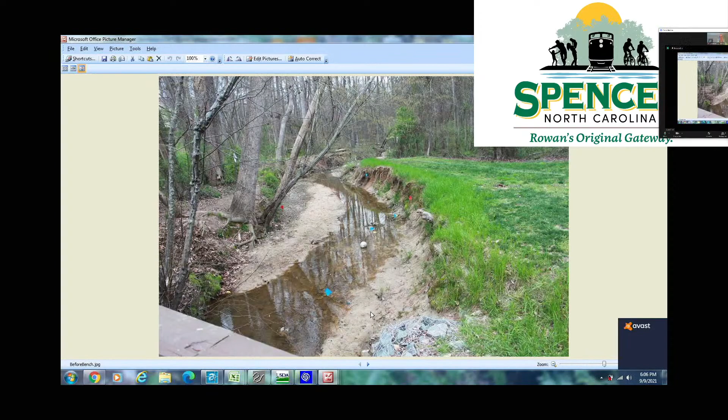We had talked about last time, since the two 36-inch pipes on the left side—this is facing downstream, facing towards the pond if you're looking down 17th Street—opening it up to basically daylight the stream so water can get into it from the road, and also to act as extra storage for bigger storm events while it tries to get through the driveway culverts.

You had asked if we could use the cost share money for that, and I checked with Tom Hill. He said he'd want to see the plans if y'all decided to go that way, but he was 99% sure the sections that were daylighted could come out of that money. But the pipes going back underneath the driveways, and putting the driveways back after we tore them out, the concrete—that could not be covered. And I broke up the cost of that.

I've estimated, because it's about 500 linear feet of stream, the stream work at about $45,000. The reason it's high is because I don't know if there'll be bed material there when we pull the pipes out. If not, I've got to plan on bringing in stone to make the bottom of the bed. Now, there was a stream there at some point before the road was built, so if it was right where we're digging, there should be base material there.

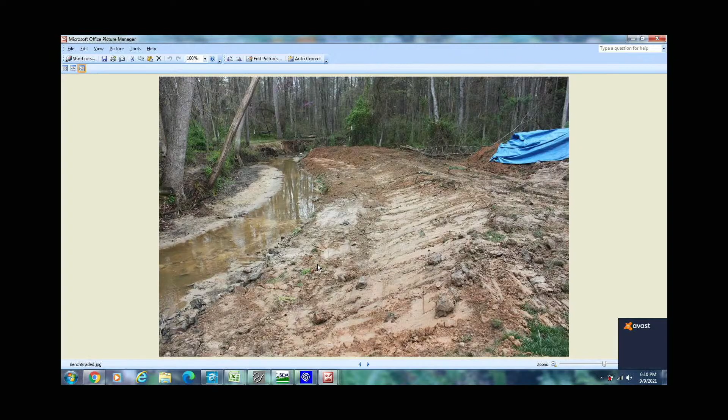Here's one before it went in, and here's one where we graded it. This is a 5-foot bench—on y'all's I'll blow it up—but you have an urban curve bench versus a rural curve bench. Since y'all are urban, you'll have the rural curve bench, plus another bench for your urban flash floods. So instead of a flat 5-foot one, you'll have 3 feet, step up about half a foot, then another 2-foot bench, then slope back into the existing contours. This is what it looks like once it's matted and live staked.

Another thing to mention: for the contract period, they are not allowed to mow 10 feet back from the front of the bench at the top of slope. It has to be left with some denser vegetation if it's being paid for by cost share. If you want to do it yourself and not get cost share, you can mow it, but if you use the cost share money, that's something to think about. They cannot mow within, or spray and kill vegetation within, that 10 feet. They can keep it maintained at about 6 to 12 inches, and we can do native grasses, but they can't mow it like a lawn.

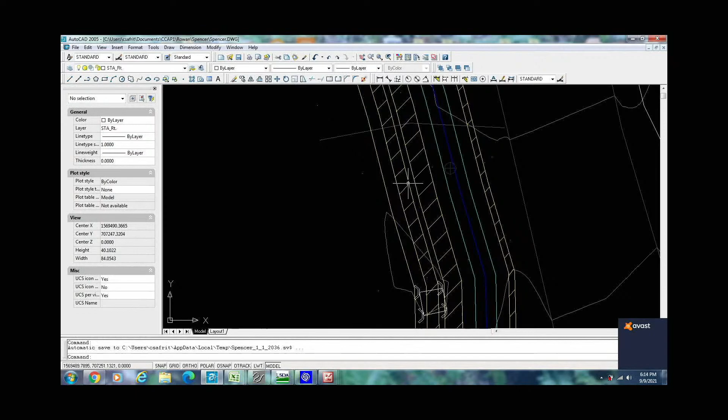Is that the part highlighted in yellow? The yellow is those benches, and if I scroll in right here, this is that first bench I was talking about, it's 3 foot wide, then a foot just for that half foot of elevation jump, then another 2 foot bench, and this line is where I tie back into the existing ground. For landowners to know, it's everywhere through there. A few places I'm a little over, but I'm about 25 feet from the road edge into their yard that I'll be taking up with what you just saw.

And the homeowner has to okay this, is that correct? If you want to use cost share money. And if we daylight the stream, I have to submit for 401 and 404 permits, and every landowner has to sign an agent authorization form giving me permission to apply for permits on their behalf.

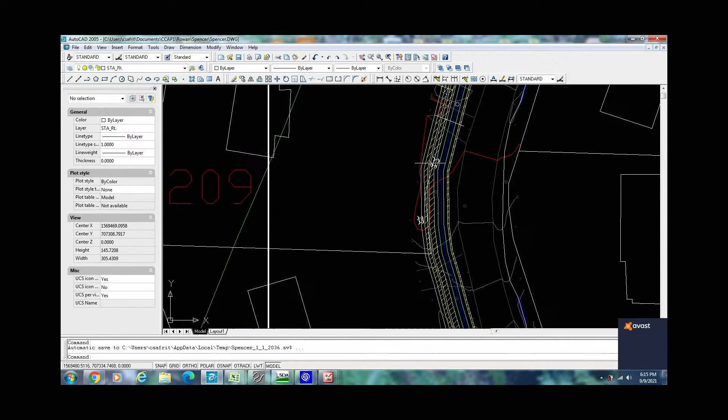Basically, they're going to lose about 5 feet of their yard, is that right? Probably, well the people that already have the stream open will lose about 10 more feet, but these people, it's piped. I don't know if anybody's rode out there, but right here is where a yard inlet is at in this house. Let me measure it, I think that's about 5 to 7 feet more into their yard from that yard inlet. They're used to having it flat out to the road, and it won't be, it'll look like a stream channel like the pictures I showed you before.

What about water mains, water services, and sewer service? Well, you've got a pipe there that's a 36-inch pipe on this side, and I won't be going lower than that, so I shouldn't hit anything on the left-hand side. Now on the right-hand side, when we get to it, I'll probably hit some hydrants if they're all right below the surface like we talked about. If they're right below the surface, then the lines to the hydrants will need to be lowered, and that's an extra cost on the city.

If you want to do the right-hand side, we'll go over that in a minute, what's got to happen there. But on the left-hand side, I shouldn't hit anything because you have a 36-inch pipe running through there now, and I'm not going to go any lower than what that pipe is. Well, I need to go 5/10 lower, but I don't anticipate hitting anything additional in that 5/10.

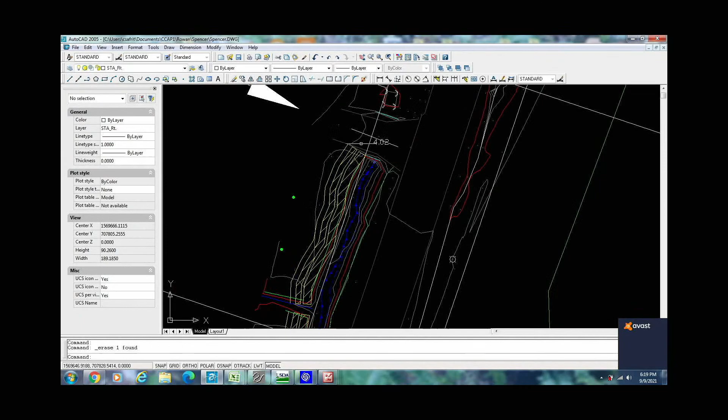I'm worried if you lower the ditch in 403 to 409, 6 more inches, you're going to run into problems with sewer lines and water lines. I need to drop the... okay, I can leave everything where it's at now, but I wouldn't be able to seal it because I have to have a foot of cover over a 36-inch pipe to meet standards.

Right now, y'all, the pipes that do have 36 inches, all your pipes basically down through there do not have that amount of cover. And you can go back with that. It won't pass quite as much flow without the foot of head over it. But then I wouldn't have to lower it at all. I do need to lower it just 6 inches to get the 36 inches.

Still probably going to hit it, okay. I would think. Do you know where they're at? I do not on the left side, because all you're going to get on the left side are your services. You need your taps and your services. I know where the main line is on the right-hand side.

We know where it's at. Joe, is the sewer line going down that street? Sewer line, center of the road. Center of the road, you don't know how deep it is, do you? I do not. That's something we need to investigate before we do anything. Well, we can have 811 come out and mark stuff and then find out how deep stuff is. Randy could tell me real quick what the depth is over there. Yeah, and so we can get the depths.

It's not very deep. The other consideration there too is when we open it up, sewer laterals coming from those houses, are we going to be exposing them? Because you've already got one sewer lateral that comes out down there just below the property you're showing right now, I believe. It's the last house on the left. Yeah, that's in this corner.

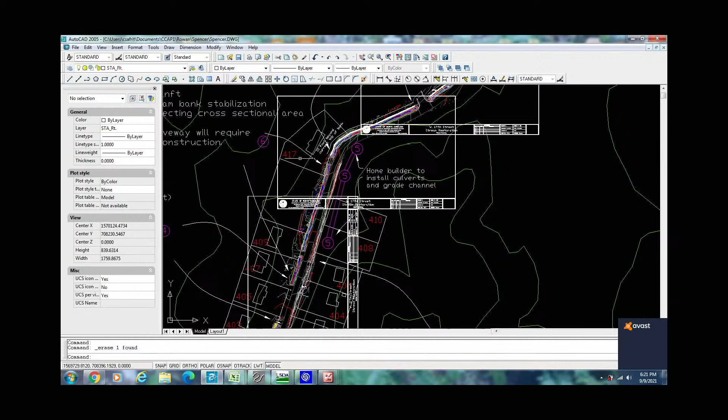Isn't it this one? There's a sewer lateral showing right there. That's those pipes right there. Correct. So my concern, I guess, is if we open all of this up that's already covered. They had to run the sewer laterals below the 36-inch culvert, correct? Right.

Unless they're just within half a foot of the culvert—and two, I can put the culverts right where they are now, and we know we won't hit anything—but you can't use cost share money on it, and I can't seal it because you won't have the foot of cover over the 36-inch pipe.

Right, or we can do a 24-inch pipe, which will raise it and won't pass the 2-year storm. Or do 24 inches, which will get you maybe the 5-year storm, and then do a weir section.

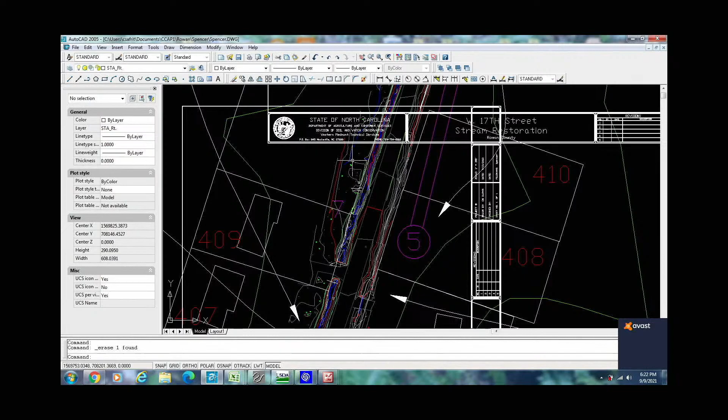I think anything we need to do needs to be 10-year storm or above. That's kind of a typical standard of other municipalities, and that's what we need to be doing. So I'll have to do weir sections in the driveways to get you the 10-year storm. And what driveways in particular would need those?

The ones with 24-inch that require greater than the 36-inch culvert, or all weir? All of them on the left-hand side require that. I mean, they'll have to be.

Two 36-inch pipes will pass it so the channel doesn't build up sediment. You put one pipe, the 36-inch, in first on the bed of the channel, and then raise the next one up half a foot, which keeps your main flow through just one pipe. That way you don't get sediment buildup that keeps backing up. It keeps it moving fast enough to move the sediment through, off the roads and through the other channels leading to it.

You won't quite pass the 10-year storm with that, but I could do just a little dip in the driveway and get you to pass the 10-year storm, if you want to do that. Or I can just do larger weir sections in the concrete driveways.

But anything over your 5-year storm, they're going to have water running across their driveway. But they have water running in the whole street now, so it won't be deep—maybe 8/10 of a foot. I think it was 8/10 deep during the 25-year storm event. Yeah, I think our goal is to keep water from flooding the streets and from flooding adjacent properties.

Agreed. I was going to ask Peter and Joel, is that something you can begin working to help pull together—a meeting of those property owners? I think we need Cindy to present, but I'd love the opportunity as well to talk about some of the logistics and the benefits of doing this. But we need their input. And I think when we talked last time, this very topic came up, and it's certainly the next thing we need to do. We were waiting on this update so we could have some information. But yes, we've got to engage the community and make sure everybody understands where we're headed.

I agree, but we also need to pinpoint what area you're going into, to know what homeowners we're targeting. That makes sense, because the original plan was to do everything below the homeowner, and all of those homeowners were involved up front—they went before we went to get the money, and they were all on board. But they already have open channels, most of them, and we would just be replacing driveway culverts and taking 5 or 10 more feet of their yard, which isn't a big deal to them. It's already eroding and looking bad.

But these have never—because we didn't bring up until the last meeting—about opening up the channel. So we were just thinking, if y'all were going to do something, put in another pipe, another 36 inches, which still won't carry even the 5-year storm event. But since it was just going to be additional pipe, we hadn't gone to them, because other than construction, it wouldn't really affect them that much. It'd be right back like it was.

I mean, we only have, what, 25,000? Yeah, from us, and I don't know how much y'all have set out. I did get a rough bid from a concrete guy, and he estimated tearing up the concrete and forming up and pouring it back at about $3,000 per driveway. So every driveway we tear up, you're looking at $3,000 to put it back, plus the cost of the pipe, and then the channel work.

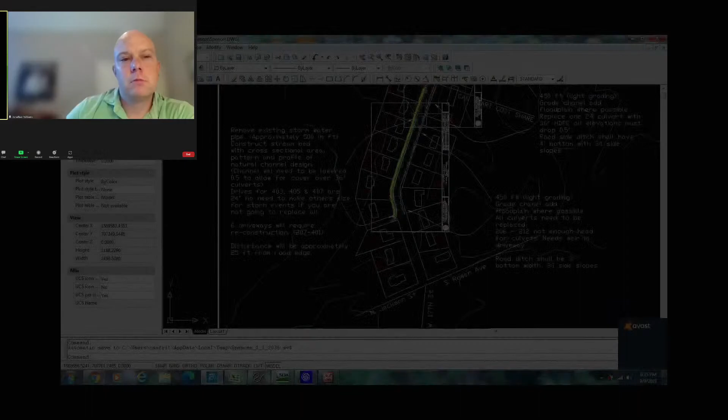And for the 404 permits — even if you don't use our money, I still have to get 404 permits and 401 permits, and I have to have their sign-off to submit for permits for them. So yeah, all of them have to sign off on it, including the homeowner.

If I don't have to seal it, then I don't have to have that foot of cover over the 36-inch pipe, although I still would recommend it — that's what the manufacturers say you should have over it. I might could pass a little bit bigger storm events if I'm not trying to get the correct amount of fill over the pipes.

We're still in the same situation, where we're only making a minor improvement to the amount of flow it can pass for what amounts to a whole lot of pipe money. So if we're gonna do it, we need to do it right.

Can I ask a question? I'm assuming all this water is gonna be channeled into Grants Creek, eventually. Okay, so I know the project you're speaking about is way below the pond. But what impact is it gonna have on the force of the water going towards Grants Creek?

Well, in the bigger storm events, you're still getting all that water, it's just coming down the roadway. But by the time it gets down there to the end, it's making its way back into the creek. Anyway, you're still getting it, you're just not getting it all in one spot, channelized. But when we do the design of the channel, that's why we have the different benches, so that your higher velocities stay in the center, and out toward the edges the velocity is a lot slower, which keeps it from eating up the banks.

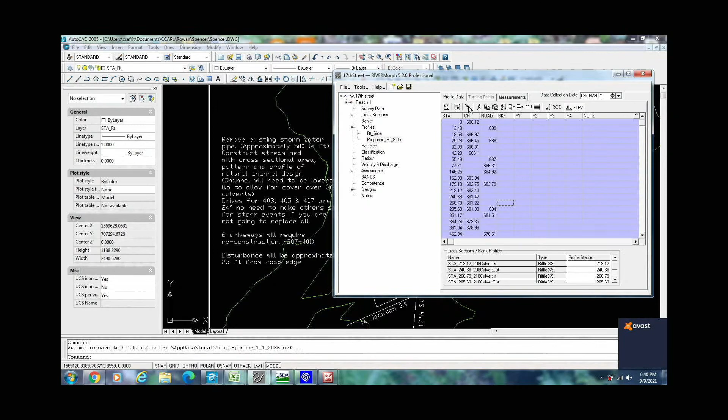This is basically the long profile. I went down the ditch starting at 202, right there in the bend when you start coming around, which you can look at on your plan. Actually, it starts at 206. This right here is 206. I'll turn these on - these are the culverts - then turn them back off because it gets hard to see. Here's your 206 culvert, your 208, and your 210.

What happens here - this line, which was sent to you electronically, is the existing ground. These right here, your top line, is your road. Your plus sign line is your existing ground, and you can see right here, your existing ground and your culverts are inches below the top of road. So there's no way all that flow, even in the 1 year storm event, isn't coming out into the road and into their yards, just like y'all said.

Here is a proposed ditch line and culverts that will work, but for 206 through 212, if I leave the line here, I still don't have enough head to put a pipe in there to pass the 10-year storm. So they would all have to have basically a weir section or a channel through their driveway. Otherwise, it's going to come out into the road still. It can get into the ditches on down the road once we start getting some head that we can get over the pipes.

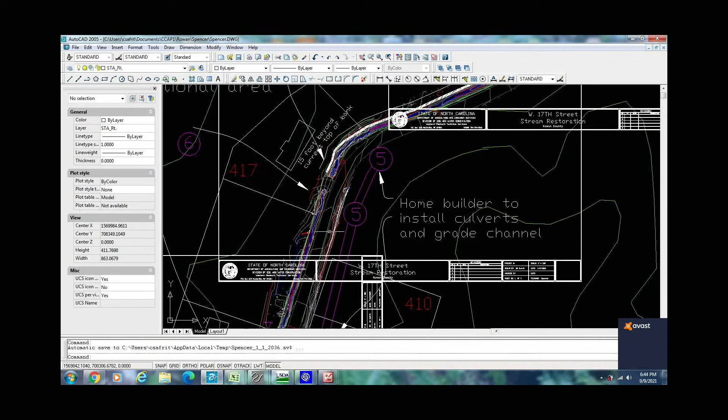25-year storm event without doing a dip in their driveway, but the lower one cannot. So if we don't make anybody else do it, it probably wouldn't be fair to make them pass. I can pass the 10-year storm with them without putting a dip in their driveway, but because of that extra, there's additional drainage area that comes in after 408 to 410 that bumps them up, and it gets really flat. I looked downstream to see if I could drop this channel more to get a bigger pipe in to pass it, but I can't.

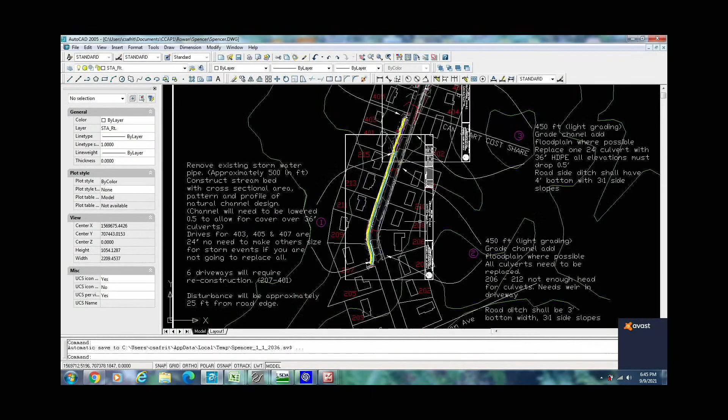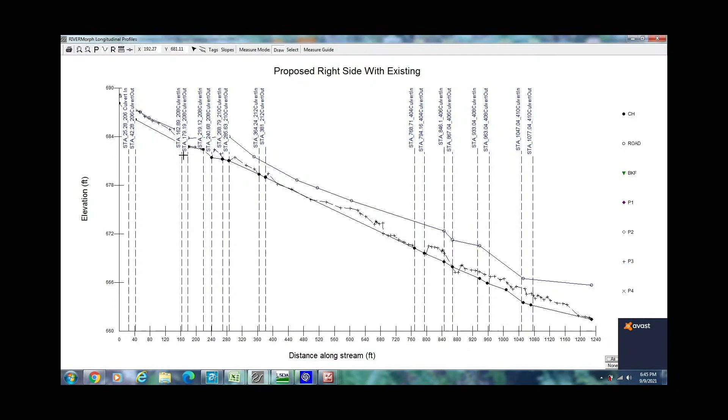There's just not enough slope to have even downstream. So I can go back and look. I'm pretty sure I can get their 10-year storm through just a pipe. But that's, you know, I added while I was waiting to do number 2, which is 206 to 212. You're probably looking at about $15,000. And we hadn't talked about doing that at all. I didn't really, I mean, I knew it looked like the water wasn't getting in there, but I didn't know how bad it was until I plotted out the long pro.

So it's all really how much money you want to spend. And then if you don't want to do dips in anybody's driveway, I'll have to get a little bit more survey data on these people's lots to see, when I drop it down 2 more foot, I'm probably going to go back into their driveway a lot more than the other people's to tie back in at a respectable slope that they'd want to drive up.

Now, where you start at 207, the beginning of the line, you're picking up flows coming off Salisbury Avenue, behind these properties here, right? Behind 203, 205. Are they getting affected also, aren't they? There's no ditch. You've got water draining coming from everywhere, coming down from Jackson Street, and water coming down from Salisbury Avenue.

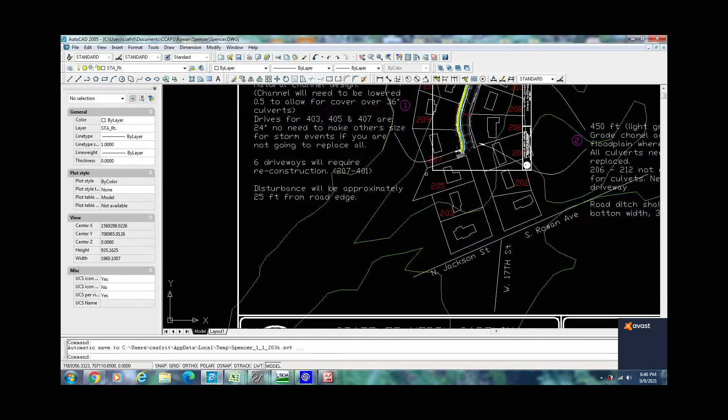From the embankment. I can show you the drainage area if you want right here, but there is an open channel that comes right here and comes between 207 and 205. And it enters your culvert, and that goes straight up to Salisbury Avenue. But all of them have open channels.

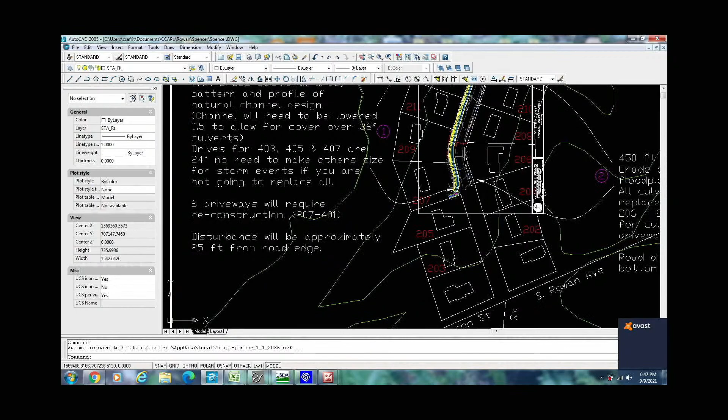What your problem is, your road's so low, and there's just so much water, there's not enough room to get big enough pipes in there. On up, I don't know if they're having problems, but anywhere where they've got the open ditches and a good amount of slope, they shouldn't be having problems. It's because you're so flat through here, you're getting all the water, and then the road's low. So I just don't have a lot of room to keep it from getting out into the road.

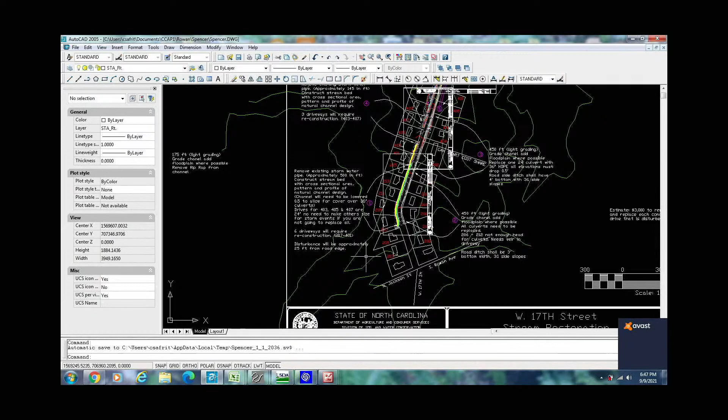And just keep in mind, farther up, what you're talking about, where Cindy's showing, that's City of Salisbury. Oh, is it? So yeah, where her cursor was, that's all City of Salisbury. Right, so I can pull up the drainage area if y'all want. Part of their drainage area actually extends into Salisbury. So my thought is we can only control what we can control.

And in the middle of 17? Yes. No, it's up just a little bit, but I think that one house on the corner is right at, is pretty close to the dividing line there. Might need to pull up GIS to take a look.

From Rowan Avenue back, the first house on the corner is Spencer, and the house before it is also Spencer. The other three houses on that side are all in Salisbury.

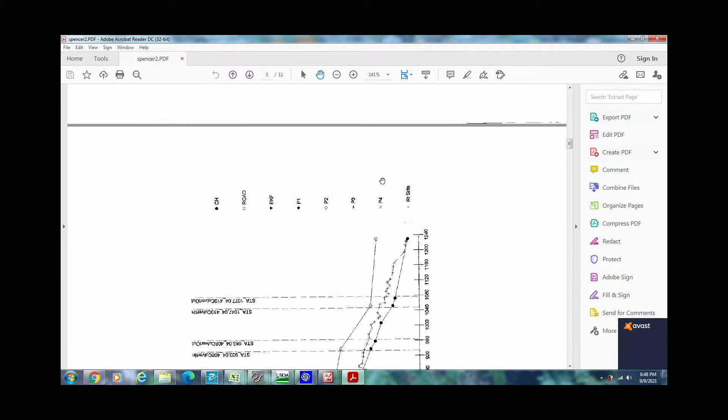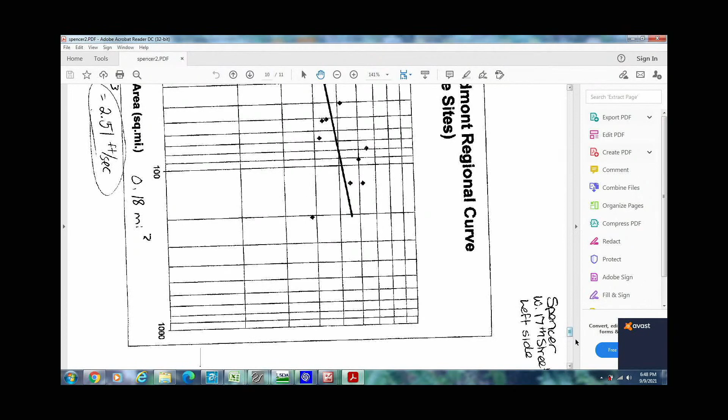Can we put a giant sump pump in there and shoot it back into Salisbury? From that corner, it goes half the street to Salisbury Avenue, which is Salisbury, and the other half of the street, if you notice, there's a paving line in there. Yeah, we paved half of it, the other half belongs to Salisbury.

It's kind of a weird corner right there. A little strange, but yeah, you're getting all of that water, all of Beauregard and Pickett's water, and then, you know, Street 207, that's where it goes.

Where they built that little tiny house on the corner, is that on Rowan? Rowan, yes sir. That's on Rowan. So is that a Salisbury house? No, that's a Spencer house. The little one with the statue, right across, in front, right across Rowan on this side.

Okay, I can't remember what the lady's name was who lived right there. Got it, it's the house with the red roof. That one on the corner, and the one before it is in Spencer. We service those two houses with garbage service. The other three are Salisbury.

Okay. I can show you the drainage area, but there are a couple things we need from the board tonight. One of them is we need some direction from Ms. Safrit on what level of service we want to provide for the design.

Do we want the 25-year, or do we want the 10-year, or do we want something less? My recommendation, based on everything I've seen, would be that we do similar to other municipalities, and for this particular project, we would adopt the 10-year storm as the design storm.

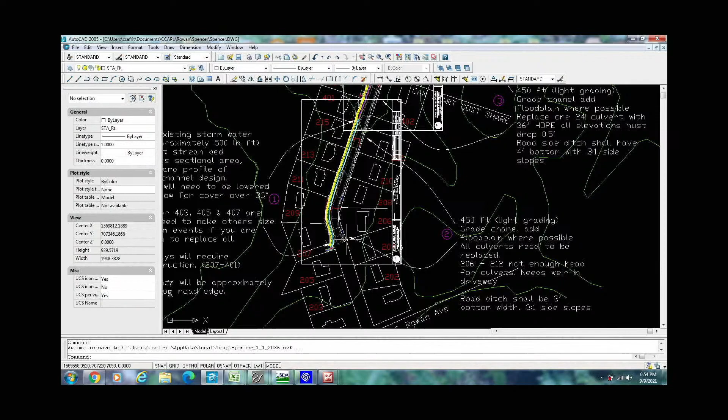Yeah, most of the houses through there, their elevation is higher than the road. The house itself, the front yard dips, so the water collects in the front and then it keeps moving down. So I haven't heard of any of them going into the houses. But like when we had the hurricane, we got a day full of nothing but solid rain, water was well into their front yards. And then it gets there and it stops up those drains.

Well, then the water's this deep and I can't get out there to unstop the drain. But it doesn't matter because the pipes are already full from upstream. It doesn't really matter what you're gonna do at that point. They're not gonna take any more water.

Another issue I think we've got there is we've got several driveway culverts and pipes that are already in the ground there. I'm concerned, if you notice, there's several very small culverts under those driveways, and there's several that are completely collapsed. Joel, I don't know if you've noticed that. Oh, yes. So that needs to be a focus of this project as well. If we're gonna fix part of it, we need to fix it all.

Well, that was one of my questions. I can do it, but drop it down and handle the 2-year storm through there, and I think get culverts that'll pass it if I can drop it down about 2 foot. But I know in between these houses, I got 2 hydrants at least, maybe 3. I'm not sure if that's a hydrant or a power pole, he didn't label them for me, but I know that's a hydrant.

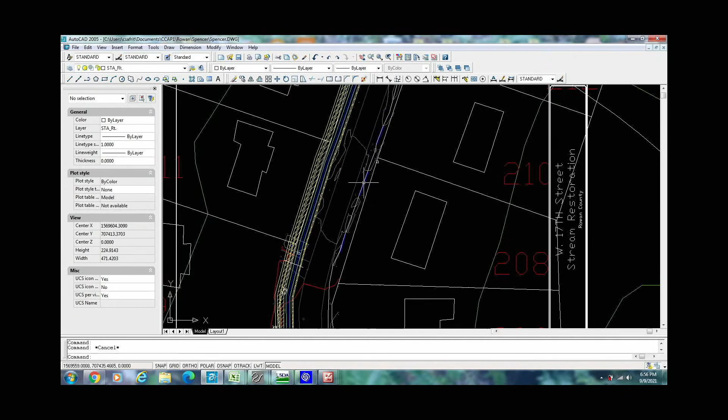I think there's only two. Yeah, two. So there must be only 2 and a power pole. And they put in another one, because I remember that. I think there's 2, and then one at the new houses down there. If I drop it down 2 foot, I'm likely to hit a good little bit of stuff and have to move a whole lot of stuff.

So that was one thing. That's why I didn't know if you wanted me to do dips in their driveways there. I can do dips in 206 through 210's driveways and pass the 10-year storm, and not have to drop it down so low. I still need to drop it down about a foot from where it is now. Up on the high side, we might can get that.

Okay, but down in that creek bottom, we know where it's at. Yeah, you're not gonna get that at all. So I think one of the things, Joel, that we need to do is get with SRU and their GIS to get the inventory and elevations on the SRU utilities, because right now we're just speculating where that stuff is. So what we need to do is know for sure, based on the elevations that they have.

Then we can go from there with utility locates. But it does sound like, if we do it right, we're probably going to have to do some type of utility relocation. And that's a conversation we might need to have with SRU. I just don't want to halfway do something and say we've done it, and it not alleviate the problem like we wanted to. It's a whole lot of money, effort, and time to not get the result we want.

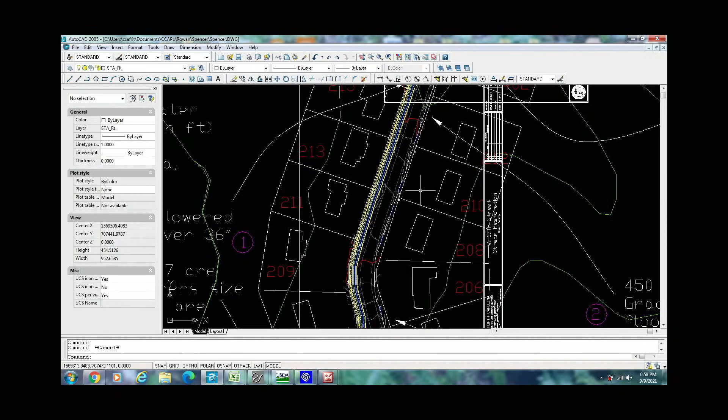You'll pay 75% of what it's gonna cost you and not pass all your storms, but the 10-year storm is doable. The 25-year storm is not doable without putting dips in everybody's driveway. So my question back to the board is we need to provide some guidance to Ms. Safrit and our staff on what level of storm we want to design to for this project, so we can also communicate that in our educational sessions with citizens and homeowners in that area. My recommendation would be a 10-year design storm, but I'm open for comments and feedback from the group.

How do you feel, Joel? I agree with the 10-year storm. I think the 25, from the numbers we've done, especially with the new houses over there— I'm not gonna say it's not doable, because it is doable, but it's gonna get really expensive really fast for a 25. I mean, utilities are not even gonna be a question at the 25. The 10, I think, is very doable, and it would be a major improvement over what we have. Just my opinion.

And like I said, nothing will fail with the 25-year storm, but it will get out into the road and overtop driveways and stuff like that.

This piece of paper here says 153,500 for the total job, not counting— that was my rough estimate, and that wasn't counting utilities because I hadn't gone through and done it yet. But if you add that, I put about 15,000 for it. That's if I only have to take out about a 25-foot section of their driveway. If I've got to take out more driveway to tie back in and drop them down, it'll be a little bit more than that. But I have to get some more survey data—I didn't get enough survey data of their driveways.

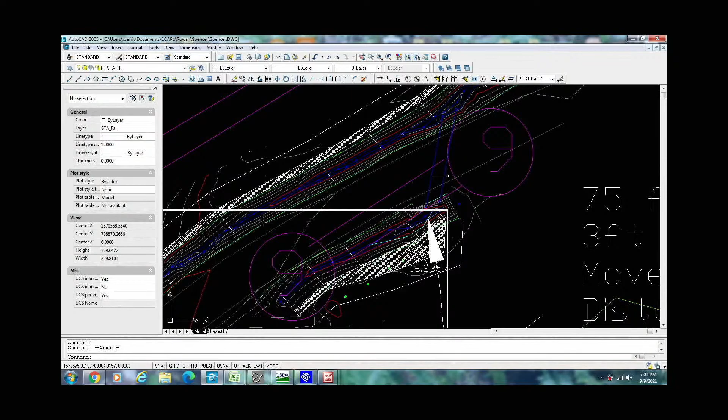Right down here is the pond, right in this area. The crossing is just below that. Do you have that pipe that goes under? Yeah, right here, this pipe is the one you're talking about. That's it, that's the trailhead where the trail comes out to Spencer Avenue, where she's pointing right there. That pipe underneath is needing to be replaced as well, but that's a different funding source.

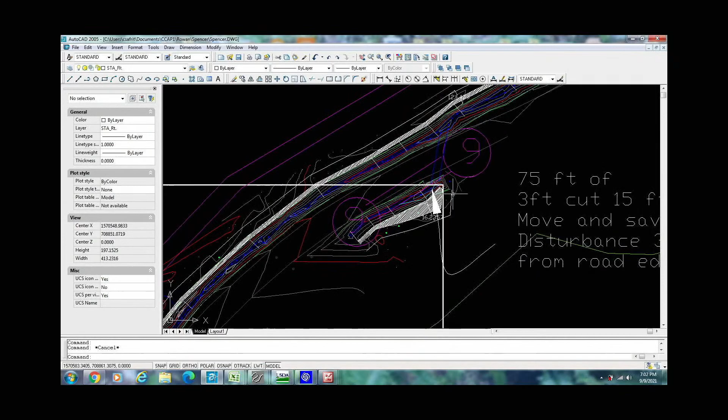We can work around that one. The question I have, just throwing it out there as far as direction, do you want her to continue to work on this, and then the 25 CCAP we have a time constraint on? Do you want to go with the original plan to widen the lower part? I think that's my question, and that would be my recommendation to the board. Since we're only talking about $25,000, we need to move on that.

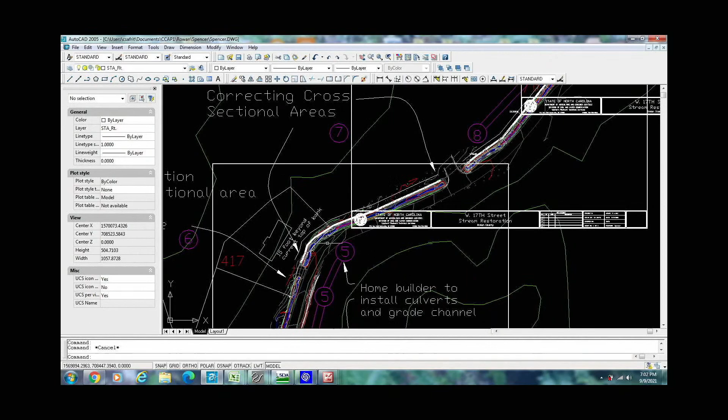Agreed, and we got a time constraint on it. We need to get moving, and she's already got the plan, she's got everything, you can pretty much get ready to start construction on it. And then, I'd say it's my opinion we have a time constraint on all of it. It's just one relates to funding sources, and the other relates to bettering the drainage for our citizens. I agree, but the first part is gonna dictate the next part.

We said you were widening what? Lower, from basically Pickett Avenue to the crossing down at the bottom. In that area, she's gonna widen the ditch to accept more water. So basically it's more like a reservoir, that way the water doesn't stop upstream, it keeps coming until it fills that up. So that's kind of a relief, and then the part as you go on up the road will just build upon that. The water will get to that point faster, but it keeps it out of the road, so it's kind of like building blocks.

This part is not gonna hinder what we're gonna do later. It's just the fact that we can move on with this because we already have the permission, we already have the landowners, everything's fine and it's ready to go. So we can see some progress. You're talking about a narrow 2-lane road now. Yeah, but the ditch is gonna actually widen to the other side. It'll be benched on the other side.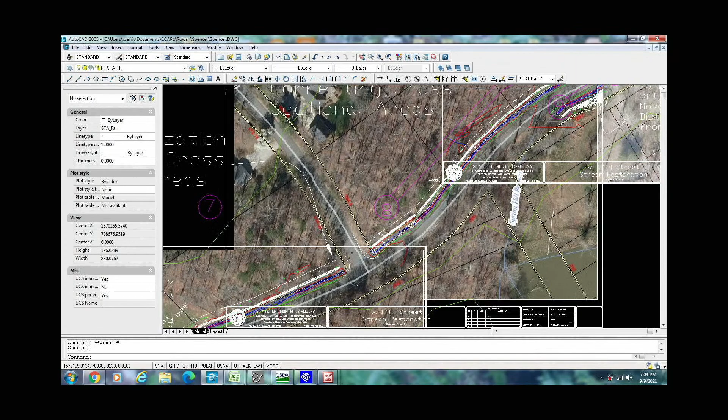I put it on the aerial so you could see which houses and lots were involved, but I can take it off if you can't see. Right here is Pickett, and right in here is your stream, and it hugs up against the bank. So all my work will be to the left-hand side, and the same is true down here. I'm going to be coming into these property owners about 25 to 30 feet with the benches and where I tie back into existing grade. All of the work there will look like the pictures I showed you in the beginning, that's what those hash marks are, those benches. I think you said you own maybe down here, these are all empty lots.

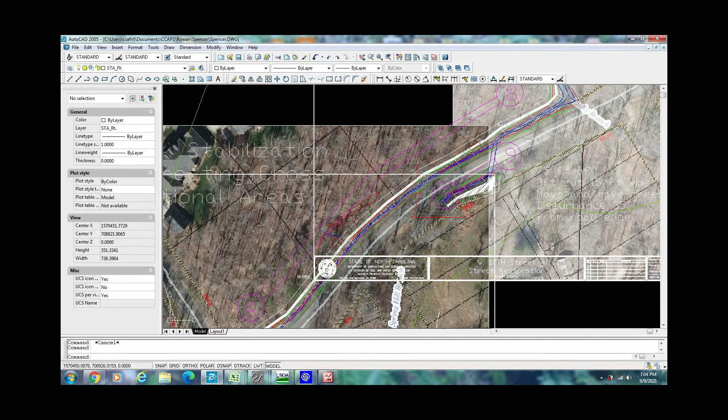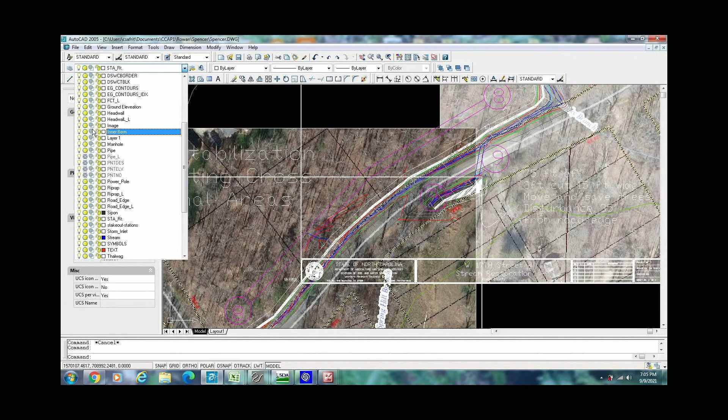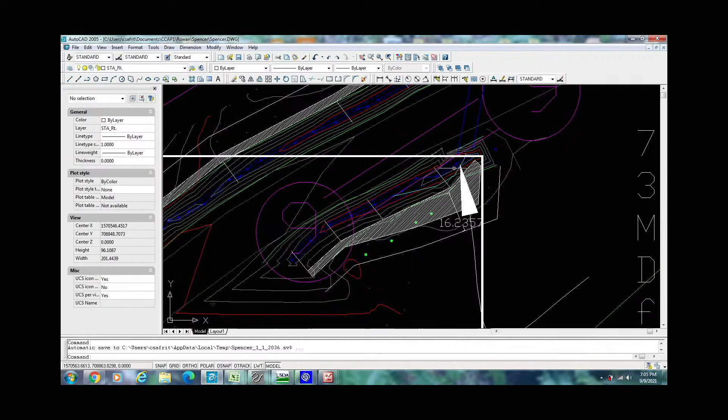Well, there was 3 right through there. And then this one is the one that lives by the pond, which I thought maybe they were gonna sell at some point and y'all were gonna buy it. I don't know if y'all have yet. But we talked to them in the street when we were out there surveying, and they gave approval to theirs. I need to come back into their yard more because this pipe is on a horrible angle, and I need to realign the stream here a little bit and put in a structure to get it into that pipe. I need extra area here to make that curve. They have a lot of trees, I don't know what kind, but they gave us permission to dig them up and replant them, knowing they might lose some when we do that.

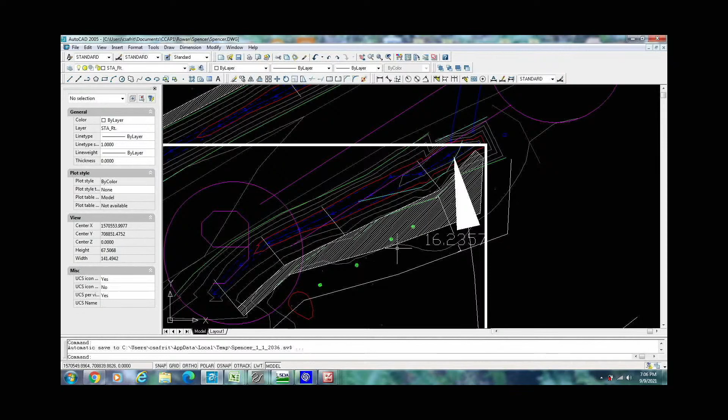But to do this, I'll have to submit 2 different permit applications for the 401 and 404 to go ahead and move forward with this one. So it'll cost $570 to submit the applications, and that would be 2 times that you'd have to pay if I split it up.

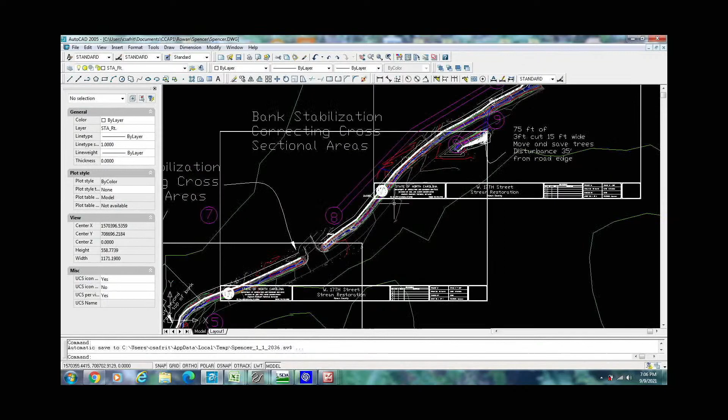But I think linear foot wise, you might get kicked into 2 anyway. They only let you go so many linear feet before they make you do 2 anyway. All I would need is the landowners' signatures in the areas we're gonna work. So if we wanted to meet with them and get those signatures, I'm ready to submit those for permits as soon as we get the signatures.

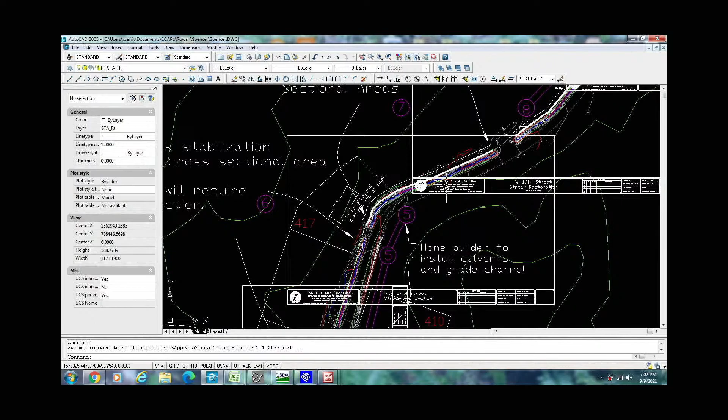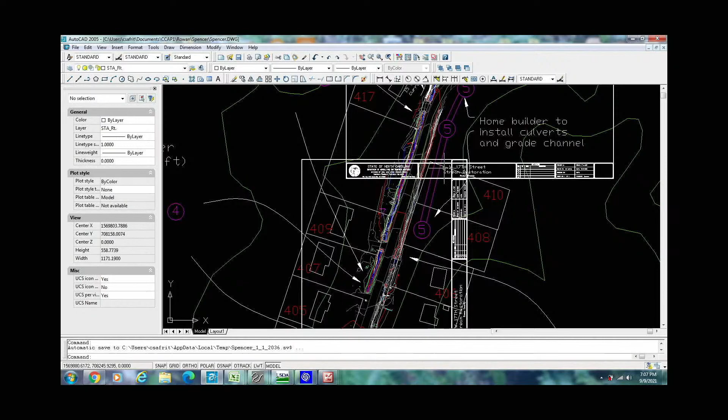So my recommendation to the board would be that you consider moving forward for this particular portion to use the CCAP funds and get that underway. Then we'll continue to refine the upper portion of 17th Street because we definitely need to move that forward, and we need to know cost on that and where we'll use the funding source. But my opinion is we need to get moving on at least some of this to show we're making progress in the area. So what Ms. Safrit would need tonight, and Joel, would be a motion from the board and approval to move forward with this particular portion of the CCAP project and to apply for those permits.

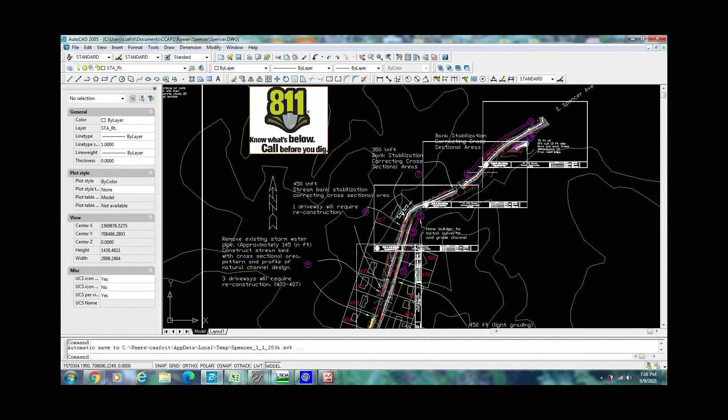Mr. Mayor, I make a motion that we proceed on behalf of Ms. Safrit and go ahead and do this work. I second. All right, there's a motion and a second. Any further discussion? All in favor, say aye. All right, all opposed? All right, that is unanimous.

And so Ms. Safrit, you have our direction to move forward and go ahead and apply for those permits and move forward with that particular portion.

Well, I guess Joel, are you gonna set up the meeting with the landowners? Are we gonna meet and show them, separate from the other people, what we're proposing? I've got to have their signatures before I can proceed, and yours too, which I included a copy in one of the submittals of the agent form, but I'll need that signed from y'all too. They're electronic submittals, and basically I'll send y'all an email when I submit it, and at that point you'll need to mail the check to DWR. I'll give you the address, but you'll need to mail the $570 check to them when I submit the plans.

But somebody will need to get all the landowners together. Well, since we've already discussed this with them once before - well, we hadn't with these empty lot people. I don't know that they all came to the meeting. I know all the people up here, the 409, 417, the 404 to 410, they were at the meeting and they're all on board. They're very affected by it. But down here on these empty lots, I don't know. I don't know on the empty lots, I don't know that they know, but we've gotta have them.

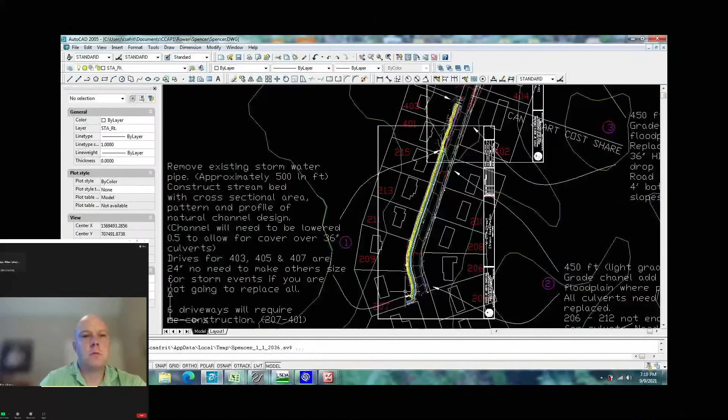Okay, I will, but I'll find out what those are and then what we need to do, Cindy, whether we just need to go talk to them individually or get them together as a group. Okay, and we'll figure it out. And I guess for this upper portion, I know you said wanting to get a true cost estimate from a contractor. I have several that'll come bid jobs for me, but I hate to abuse them. I don't know what to do first. If the landowners aren't gonna sign on board for this, I almost hate to waste their time getting them to bid all of this work and the box culverts or whatever culverts we gotta do, if the landowners aren't gonna like it.

So I don't know if before we get a cost, if I can design it to the 10-year storm, get their approval, and then get a cost on it, if that would be all right.

Yeah, I think what we need is to go ahead and provide you with direction tonight. I really need the board to make a motion on what design level of storm we want it designed to. Then, knowing that, you can refine your design to achieve that.

And looking at the box culvert and those sorts of things, we need to look into now whether there's a huge cost differential. If it's 3 times as much as a standard concrete culvert, that might be a non-starter. But if it's 50% more, it's probably something we need to look at if it's going to achieve that design storm. So we need you to look into that.

But then what I need our town staff to do is work on getting a meeting set up with these property owners to describe the project, what we're proposing, the benefits it will provide, and any impacts to their properties they need to be aware of. I want to get them on board as soon as we can, because if they're not going to sign off on it, then from the 401/404 permitting perspective, we're going to have to drop back and consider other alternatives.

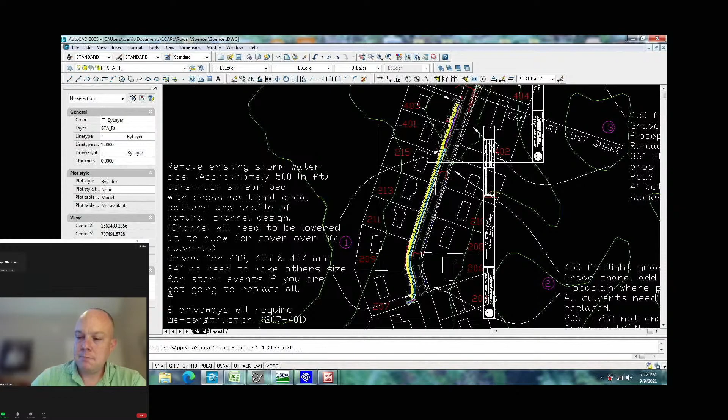It's already piped. If we just pull out the pipe, put in a bigger pipe, and add an extra pipe, I don't think we have to get their sign-off on that. We'll still be in their yard with an easement to put in another pipe, but if we're covering it back up, I don't think they should care. They'll lose their driveway for a couple days, but otherwise it won't affect them much if we go back with all pipes.

I think we need to provide both options to them as we discuss that, but let them know the limitations of going all pipe. It's not going to solve their issue. It can't pass the 10-year storm. There's not enough elevation, not enough head over the pipes, and not enough drop downstream to lower the pipes to pass the 10-year storm.

Okay, I would like to make a motion to allow Engineer Safrit to proceed with designing this project for a 10-year water event. So, 10-year, 24-hour storm, to clarify, Mr. Morgan. Yes. Okay, so there's a motion on the floor.